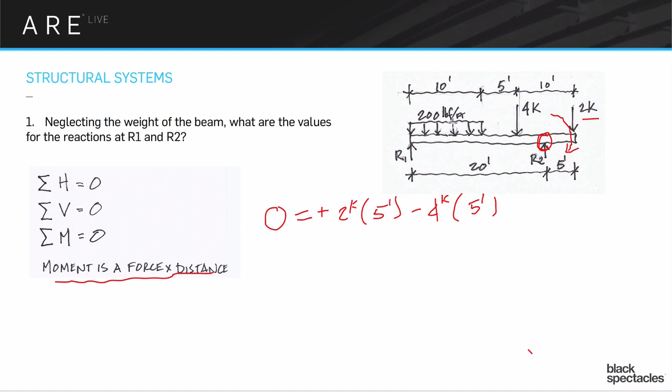And then the next force we have is this uniform load, and that uniform load at 200 pounds per square foot, we could deal with it as a uniform load, but life is going to be much easier if we translate that into a single point load. So that 200 pounds per square foot, in terms of the linear foot of this beam, is going to be 10 times that 200, so we get a 2,000 pound load.

But that 2,000 pound load - everything else we're doing is in Ks, in kips. So we're actually going to switch that. Kips is 1,000 pounds, so that's going to become 2K. So then we have another one that again is going in the negative direction, counterclockwise. So we have 2 kip times, in this case, 5 feet plus 5 feet plus the middle of this 10 foot, so another 5. That's going to be 15 feet.

And then the last force we have to deal with is then the R1. The R1 is going in, again, presumably the positive direction. So I'm going to say plus R1, and its distance is going to be 20 feet away. Getting a little close to the edge there.

So if we start to do some quick things, we're going to subtract R1 times 20 to both sides. So we get minus R1 times 20 feet is equal to 10 kip feet minus 20 kip feet minus 30 kip feet.

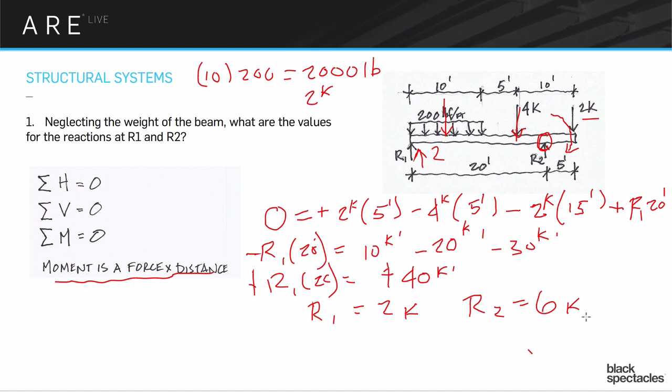So here's another type of question that they'll sometimes do: check all that apply about slump tests. Slump tests, not sump, slump tests.

Shows the strength of the concrete at 28 days, shows the admixtures in the mix, shows the workability of the concrete, shows the amount of camber in a concrete beam, shows the strength of the concrete, shows the bearing capacity below the footing, gives an indication of the final finish of the concrete.

So there's a couple of these that are actually the right answers, and then there's a couple that are sort of vaguely close that you could kind of get fooled by. But in general, there are two very clearly correct answers in this.

So I'm going to jump ahead here a little bit. Those two correct answers are going to be that it shows the workability of the concrete, and it shows the strength of the concrete.

A couple of the other ones that you might start to think would be shows the admixtures in the concrete. And the reason you would think that is there's a very strong relationship between a number of the admixtures. Admixtures are those things, like chemicals and fly ash and a whole bunch of other things that get added into a typical concrete mix.

And they have a purpose, some sort of need that they're doing. So they might make the concrete reduce heat when it's going through its heat of hydration, which is the chemical bonding process between the water and the cement, Portland cement. Or it might make the concrete more workable, make it easier to fit around the formwork. Or it might be a pigment of some kind. So there's a whole series of different types of admixtures that can be added in.

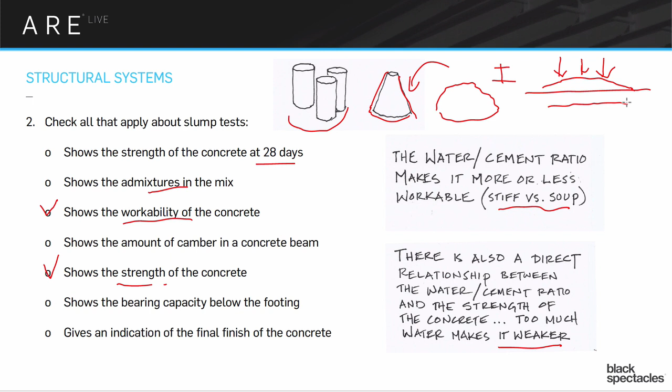All right, let's go to number 3. So far, our guess answers here are tracking. Cool, so we have lots of correct answers so far.

All right, so number 3: I would use a mat or raft foundation when I expect there to be - the answer to this one is, there's a couple different ways you could answer it, but the one I was imagining is differential settlement.

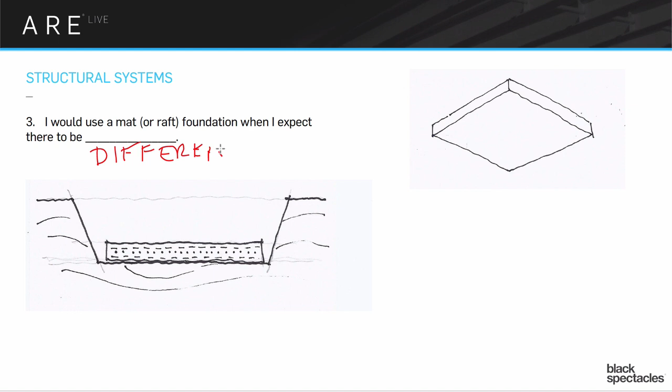Right too. So what that's referring to is in a situation where either I just can't be 100% sure about the soils that are around me, or there's really good soils, but they're way down and it's just not worth it to go down and find those really good soils. There's this possibility - what I do instead is I make a huge, big, thick raft of concrete.

So this might be 24 inches thick. It could even be thicker than that. It's probably not less than about 18 inches if you're going to call it a raft. So I have this very big, thick chunk of concrete. It's very, very heavy, but it's also loaded with rebar going in both directions.

And the whole point of this is, if you imagine - this is sort of an odd drawing here - imagine we're looking up underneath the raft. Let's say there's sort of a bad zone here, which is sort of corresponding to this soil, like it's kind of lousy soil there. And there's another bad zone there, and maybe another bad zone there.

If those areas have slightly less capacity in their soil, it doesn't really matter because I'm getting the bearing capacity out of all these other zones of the raft. And so those other zones of the raft will just bridge across. The raft just becomes a beam across those bad sections of soil. So you're essentially making the entire slab a thick beam that spans across any of the bad soils, wherever they end up being.

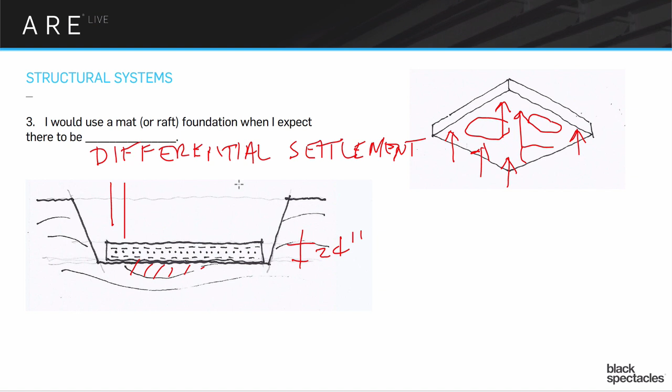So in this sort of odd situation where you dig down and you're just not sure about the soil, you put this big thing in, and then you put all your foundations and everything else right on top of that. It's going to spread the load very, very wide. Every aspect of the floor is actually part of the foundation - not just where the strip footings are, the whole thing. And because you're spreading it all out, you can sit on some pretty crappy soils that way.

One of the things that often comes into play here is if I have bedrock many feet down, there's always this kind of decision between: am I going to do a caisson foundation that's going to reach all the way down to that bedrock, or is it better off doing one of these rafts? Caissons are very expensive - you have to go down deep usually with those. So if you're reaching down 60, 70, 80 feet, is it worth doing that to get to the bedrock, or is it worth doing one of these big rafts?

The rafts are very expensive to do, and they're hard to manipulate in with plumbing and other things. It just creates a more complicated set of relationships than the typical foundation, so contractors don't generally like to do them very much. But in a situation where I'm going to float a raft at 5 feet below grade, versus having to reach 110 feet down for a caisson, I'm probably going to prefer to float the raft.

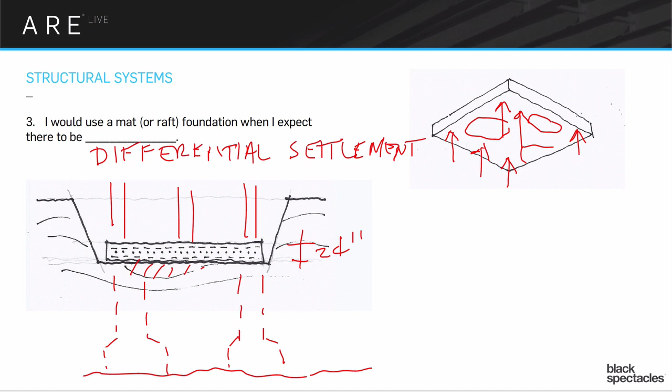All right, here's another simple one. This one is very simple, but has a potential little trick in it that is obvious once you see it, but throws people off all the time, so it's kind of worth running through it.

So, okay, here, number 4: we have a 3-story building with no basement, slab on grade, has a column spacing of 30 by 30, and an assumed live load of 80 PSF for the floor and 30 PSF for the roof. If the dead load for both floor and roof is 20 PSF and the footing below one of the internal columns is 5 by 5, what is the bearing capacity? What do we need to have in the soil in order to make this be a safe building?

And like a lot of these kinds of questions, you'll see it'll say ignore the lateral loads or ignore other things. This is sort of their modus operandi. What they want to do is strip away all the side kind of thinking that you would normally be putting into something like this, and just focus on one or two small issues, just to make sure that you're capturing what's going on in that sense.

So here we have a little framing plan, and we have a column spacing, the 30 by 30s - there's the 30 and there's the 30, and here's the internal column, so the attributable area that's going to go to that column footing is going to be halfway between that 30 span, halfway between this 30 span, and then halfway that 30 span, and again the other side. So you're going to get a 30 by 30 in there.

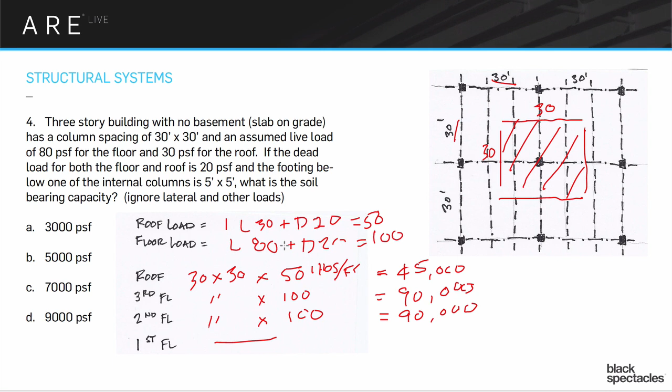So technically, if you want to be really precise, that 5 by 5 footing would have a little bit more load coming down directly from the floor above it. But the way the exam would think about it, we just neglect that and simplify. The key is understanding the difference between slab on grade and the structure above—people often get caught up adding all the floors together and make that mistake.

So we add those together and get 225, I believe. That's our total pound load coming down based on these code requirements of the 80 and the 20 and the 30 and the 20.

Then we have the 5 by 5 footing underneath that internal column. That 5 by 5 footing is 25 square feet. So we divide that by the 25 square feet, and that equals right there at 9,000 PSF. That's what the soil capacity is going to have to be in order to make this work.

Heads up here—when I actually did this, I originally wrote it as 6 by 6, but I had a typo and made it 5 by 5. That's why I've left it at 5 by 5, because I didn't want to send a change out and complicate things. It still works, and D is the answer.

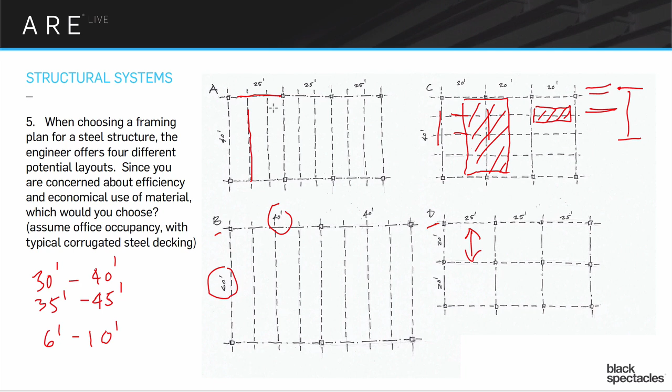The exam will always lean towards, unless it gives you a reason to go against this, the idea of having a nice long beam and a short girder, so that the depth of those steel members, those presumably wide flanges, end up sort of equalizing. You'll end up with a situation where my girder and the beam coming into it are probably pretty close to that same depth.

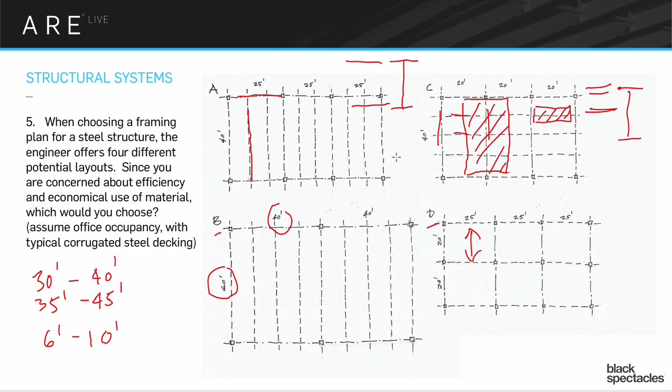That's going to be more efficient for all the interstitial stuff like the ductwork, but it's also going to be more efficient in just straight-out weight of steel and the economy of the process. So this allows us to get the best of both worlds as best as we can out of the 4 choices we've got. Hopefully that makes sense. And the spanning of the decking on that is kind of below 10, so it easily works in the typical steel decking spanning range.

All right, let's look at number 6. For design reasons, you do not want to use shear walls in the building because you need larger windows than the shear wall could easily accommodate. So instead, you would probably employ, and we have a couple different answers, massively hinged columns, braced frames, moment-resisting frames, Vierendeel frames.

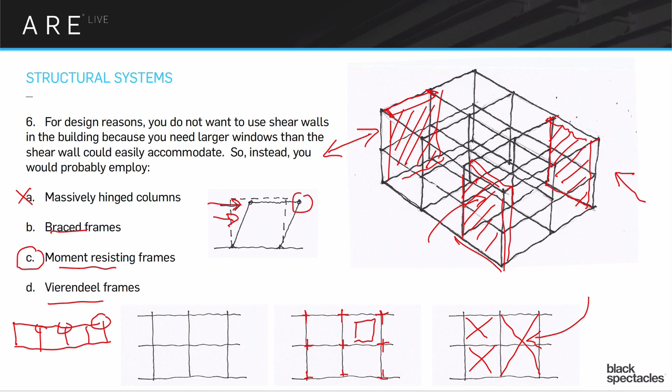All right, on to number 7. We're stepping back to some of the statics discussions here. Draw the shear and moment diagram for the beam shown.

So then comes the moment diagram, and there's a bunch of different ways that you can think about this. For me, when you're talking about diagrams, I actually prefer to think of it graphically. There's about 3 different ways to do this, but the way I think about it...

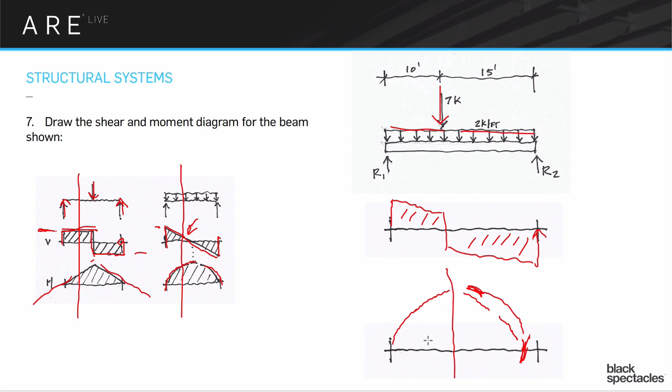Number 8. With this, we're talking about an earthquake situation. This is actually a take on one of the NCARB questions, so you may feel like you've seen it, and that was purposeful because it's a bit of a trick.

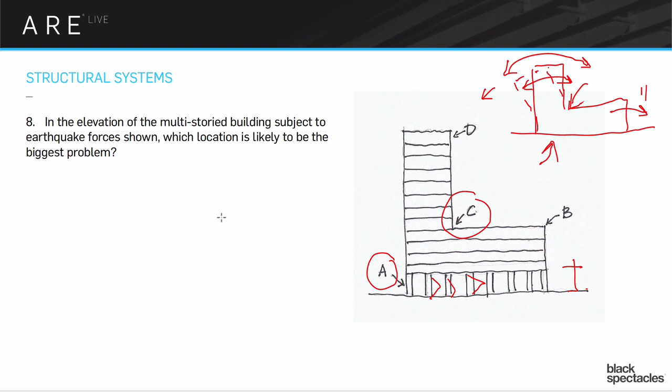So you might think about, well, what could we do about this? For one, we don't do a light first floor like that, or even up in the middle space—keep it all consistent as much as you can when you're in an earthquake zone. And instead of having this original kind of elevation L, what if we did a tall building with a separate... sorry, a little off there.

We made these two separate buildings from a structural standpoint, but still made it so you could walk back and forth between them. This building is going to move at its own pace, and this building is going to move at its own pace, and everything's great.

So this is one of those examples where if you saw a couple different versions, maybe it's not that you can't do this building, you just have to find a way to do it. What do you think the issue is if you did it this way? Because this has its own problems, right?

The issue is this thing is rocking back and forth at a different amount and a different pace than this lower structure is. So the issue is, do I get a spot right there where they're pounding each other, where one is literally banging into the other, and I get a problem point there.

So I would have to make sure that the amount of distance it was going to be swinging as it went through its various motions set up by the earthquake would be within that distance, so that it structurally wasn't damaging itself in that process. It's sort of assumed that in an earthquake you're going to have some damage.

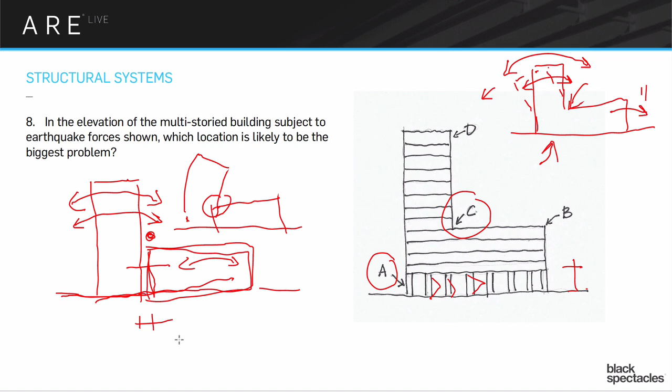So number 9: after bringing in fill from an outside source prior to the foundation installation, what test would be appropriate? We have the vane shear test, the Proctor test, the cylinder test, and the slump test.

Well, we've already talked about the slump and cylinder test. These are concrete tests, so it's definitely not either of those - there's the slump and the cylinders.

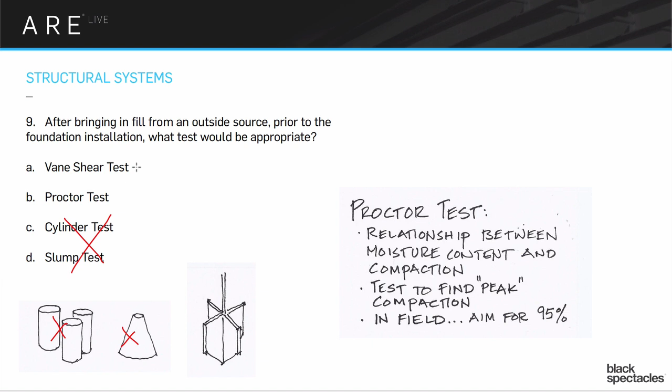The vane shear test is kind of interesting. It's related to these issues, but not in the way this question asked about. The vane shear test is - I have a stick, it's more complicated than that, but I'll call it a stick - and it's got this little cruciform shape on the bottom, and I stick that down into the ground, and then I turn it, try to spin it around.

If it spins very easily, that means there's very little lateral shear capacity in that soil. That would be useful to know if you're using the soil as part of a way to stop the building from sliding, or the retaining wall from sliding, or something along those lines. There's a lot of different elements that would be important to know, but that's not what it was asking.

What it was asking was, after bringing in fill from an outside source prior to foundation installation, what would be appropriate? The main thing we're talking about here is actually its compaction level and its ability to withstand a load. So the Proctor test is this interesting thing where a realization got made that there's a strong relationship between the moisture content of the soil and its ability to be compacted.

It's a very simple test with a series of blows and trials, understanding how much moisture is in that soil. They do a whole bunch of them from that particular kind of soil, then find the best example, and then you get a readout that gives you a peak compaction capacity.

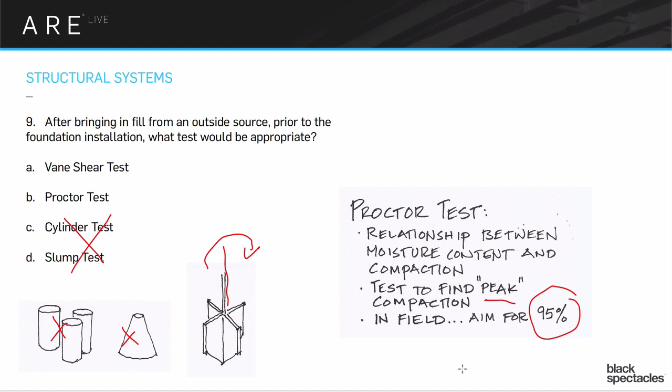Okay, number 10 here.

What this is asking is whether the top chord of this cantilever frame is in tension or in compression. Just visually, we can probably tell that it's in tension, because I have a fairly heavy load coming down at that outside point, and a relatively light load comparatively pushing back in the other direction. So I'm pretty sure this thing is going to stretch out as it gets loaded.

But just to check it, I can easily do a moment around this location. That allows me to get rid of this more complicated load on that angle, as well as any loads happening in this wall, because those are loads at a zero distance. So calculating moments across the whole thing, that set of moments all gets crossed off since they're zero distance away.

So the only two loads I have left are the 2 kip, the 5 kip, and a response up here going in one of those two directions. If we did the sum of the moments, it's a fairly simple calculation - a 10-foot dimension times the 2 kip, a 10-foot dimension times the 5 kip. One of those is going this way, the 2 kip is going this way, the 5 kip is going this way, so those are going against each other.

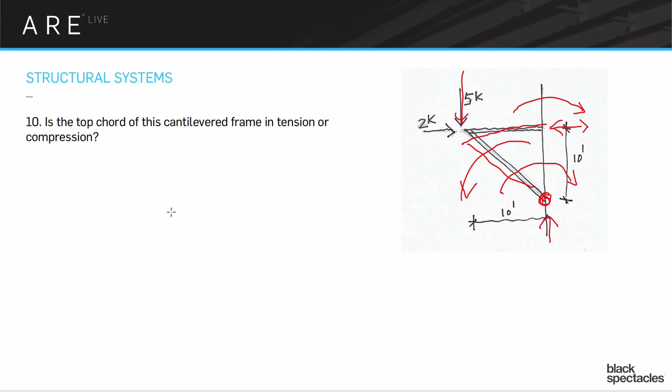Another way to do it is by a force diagram. You might start at a point, go 2 kips over, 5 kips down, then the angle, whatever it is, since it's just a diagram associated to the same length as these forces. Then to close it off, I have this coming back - that's that force, showing it's going in the same direction and that it's in tension.

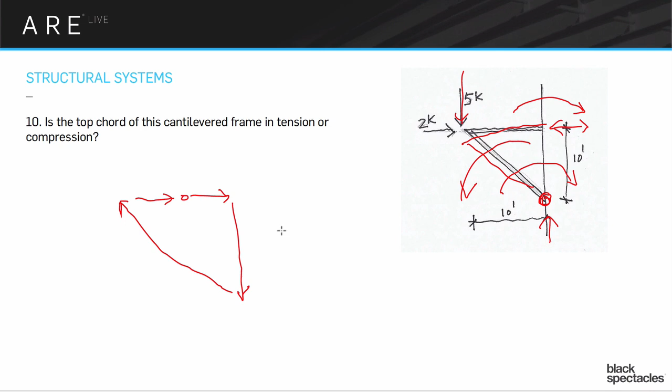Okay, let's move on to the next and last one. This comes straight out of the current NCARB exam. I usually only do ten for this, but when I was glancing at it I thought this is kind of a nice one, so we'll do it as a quick bonus since it gets at a couple of useful concepts. The question is: buckling of a column can be reduced by which of the following? Check all that apply.

Looking through the possible answers: increasing the size of the member seems reasonable. Rotating the column sounds suspect to me - we'll come back to that. Bracing the column is absolutely going to work. So increasing the size of the member and bracing the column are both good answers. Changing the type of end restraints is also probably very helpful. Reducing the length of the column is going to be hugely helpful. Reducing the radius of gyration, R, is actually a bit of a trick - you'd want to be increasing R for that to be useful.

So what's the problem with rotating the column? To understand this, let's say I have a wide flange type column. It has one axis going this way and another axis going this way. Clearly this is the strong axis - that's why we have beams that look like this, because it's very hard for that to bow underneath the weight. If we put the beams this way instead, they would be much easier to sag in comparison. The same thing is true in columns: there's a weak direction of loading and a more robust direction of loading.

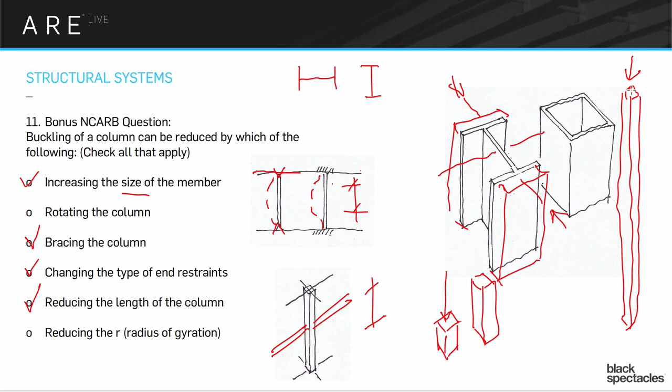So what you would be concerned about is the actual capacity of the material itself. That's where I would put all my energy in terms of a calculation. And then I look at this very tall, slender column, and there's no way that tall, slender column is going to get to the point where the material itself is smashing, right?

It's totally going to buckle before you get to that spot. It's going to bow out because there'll be some little bit of lateral load somewhere, some eccentricity, and it's going to push that thing out, and that's how it's going to fail. So that one, I'm going to be all about looking at the modulus of elasticity and understanding its ability to bounce back, and looking at the buckling calculations.

This middle zone is the one that's sort of annoying, which is actually where a lot of actual architectural projects are, because that one I can't be sure which situation it's going to be, so I have to actually do calculations for both of them.

So I just like this one because it starts to talk about a lot of different issues. You'll see the KL over R, so the ratio that has to do with this issue of the way that it's restrained is the K, the L is the length, the R is the radius of gyration, right? That simple formula allows you to start judging where and what of these calculations you're going to need to actually do.

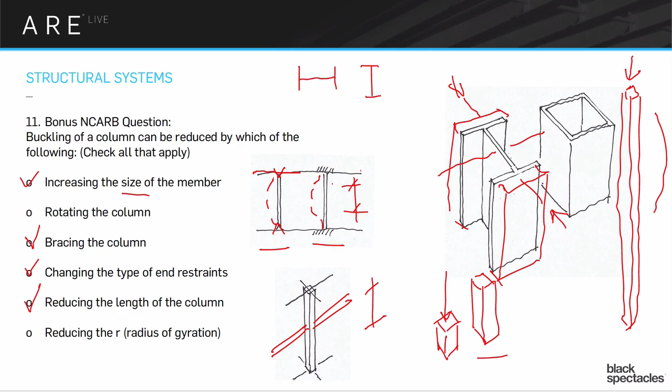The second question is from Charisma. She asks, is there a formula to come to the area multiplied by the load? I think this goes back to the second slide, maybe question 4. There are a number of different formulas, so I'm actually going to not answer that one because I don't want to confuse you. What we were looking at here was just a very simple, straightforward thing: I have a certain quantity of load coming essentially straight down.

In actuality, when we're really doing a real building, there's a bunch of other things going on. There's bracing happening, there's lateral loads happening, but in this kind of question, it's just talking about that straight load coming straight down. So if we think of that load as a column sitting on a footing, and the footing has a size, then the whole question is, can that entire load, that whole big load coming down, be held up by the soil that's down below it?

So the question is, what is the capacity of the soil? If the soil is, say, 3,000 pounds per square foot, that means we can take how many square feet we have times 3,000 pounds per square foot. If that number is bigger than our total load, then we know that 3,000 PSF soil can work. In this scenario, the way we did it, those numbers weren't anywhere near close, so it would have to be either a much bigger footing, or we'd have to go down to a better soil.

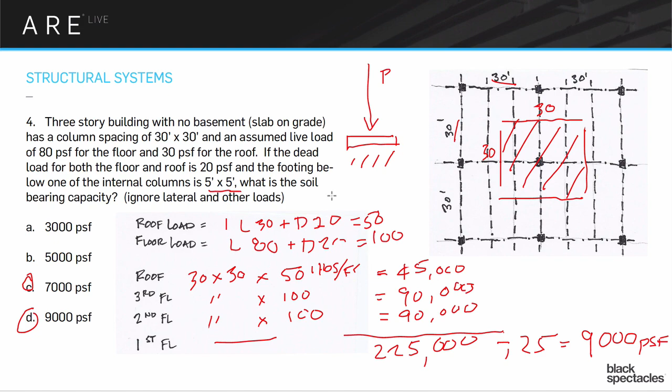Okay, so does anyone have any other questions?